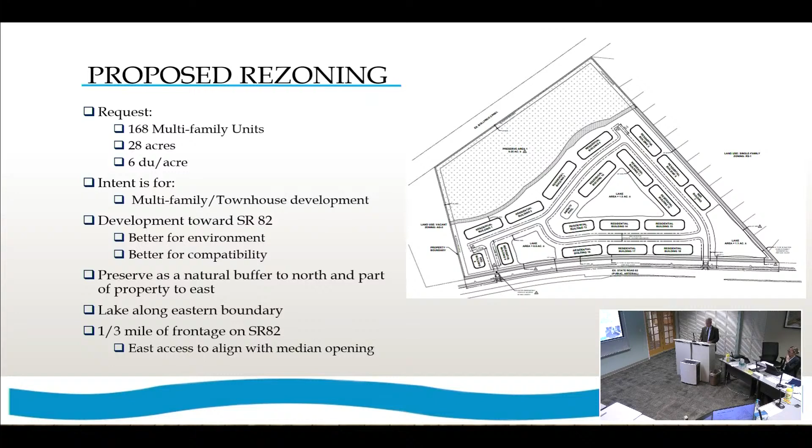Okay, so the criteria for approval is listed here in LDC section 34-145. I'll go through most of these, and others will go through pieces of it.

Compliance with or consistency with the comprehensive plan. As I said before, we're in the urban community future land use category, which is defined by policy 1.1.4. These are areas characterized by a mixture of relatively intense commercial and residential uses, language from 1.1.4. This is really the predominant land use category in Lehigh Acres. There's other central urban, which is a little more intense, but you see urban community throughout Lehigh Acres.

As I said before, there's a standard density range of 1 to 6 units an acre, but you could go up to 10 units an acre with bonus density, or 15 with the transfer of density units from Pine Island. In this case, we're proposing something right at 6 units an acre.

The wetlands on site are part of the wetland land use category in this northern area. We are preserving all of the wetlands on site, and so in accordance with the Lee Plan, we're able to transfer that density off of the wetlands at the rate of the adjacent land use category, which is urban community.

And what's the proposed building height? 45 feet, I need to look at the property development regulations. Sorry, let me just pull this up. I know you replaced the property development regulations from what was initially included in the staff report. I just want to confirm that the height limitation remains at 45 feet for the multifamily and 30 for the clubhouse. I believe that's the case, but I do not like misspeaking, which happens occasionally, so let me just try and check.

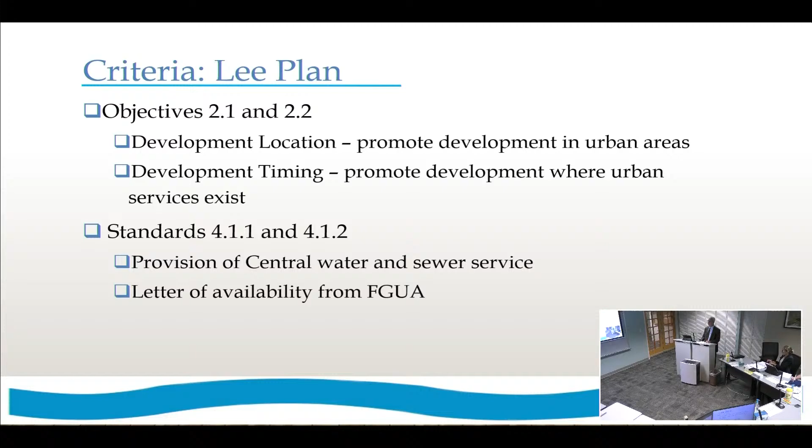Standards 4.1.1 and 4.1.2 require central water and sewer for this type of development. We do have a letter of service availability from FGUA.

Goal 5 talks about location for residential uses. Goal 5 itself encourages a variety of price ranges and housing types. Lehigh Acres, as you know, is the vast majority of which is platted single-family lots. This is a different type of housing unit in the community, so it's adding more of a variety of housing to the area, which we think is a benefit to the area.

Policy 5.1.2 directs residential development away from areas with hazards. This isn't an area where hazards exist, not the coastal high hazard area, not prone to flooding.

And then 5.1.3 is location criteria for higher density residential. Although I would not argue this is really higher density residential, I do want to note that Blackstone Corporate Park is right here. That was just entitled for, or re-entitled for, both industrial and commercial. So this is going to be a pretty large commercial center right here.

We do have several schools. There's a high school located right here, approximately 2 miles from the site, and an elementary school and a middle school. I will also note that right on this west side of Savannah Lakes, within a mile of the subject property, the school board owns property and is within active design on both an elementary and a middle school. So we do have quite a lot in very close proximity.

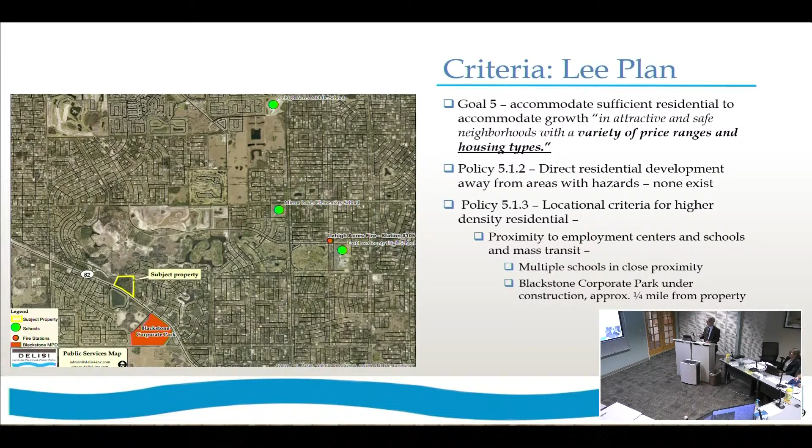Policy 25.10.1 deals with preservation of indigenous vegetation within the Lehigh Acres community. This is part of the Lehigh Acres community plan.

This policy encourages properties to preserve on their sites rather than mitigate off-site. We are doing that. We're not asking to preserve off-site, and we're not asking for any reduction in the amount of preservation.

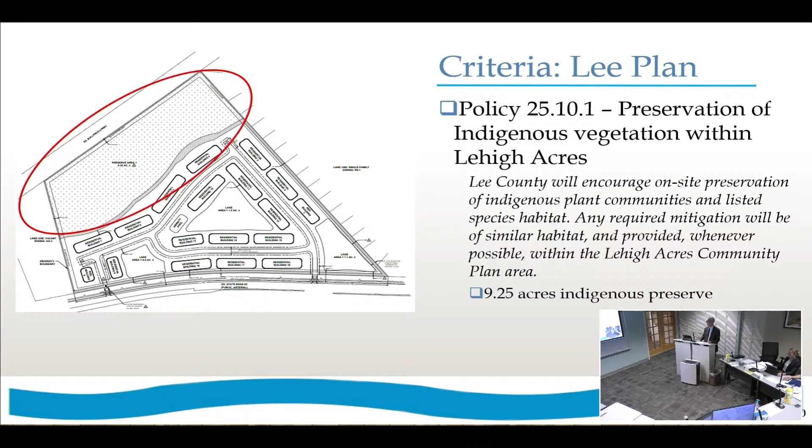The deviation on indigenous vegetation that Drew and Barrett will talk about is really to clean up the exotics in the wetlands so they classify as indigenous, allowing one larger contiguous preserve area. That's 9.25 acres of preserve.

The next criteria deals with compatibility of surrounding uses. As I said before, this is Savannah Lakes residential planned development, single family to the north. On our master concept plan, we have a nice buffer to them, which is a preserve. There's also a canal separating that MPD from the subject property.

That preserve area extends down south, probably about 3 lots, so it also includes a nice buffer for these northern 3 lots on the west side. The properties here are vacant, AG2.

We don't know what they would transition to over time, commercial, maybe residential, but right now they're vacant, AG2. To the south is State Road 82, a major intrastate arterial road through Lee County and elsewhere. And then to the south of that, we have an RV park.

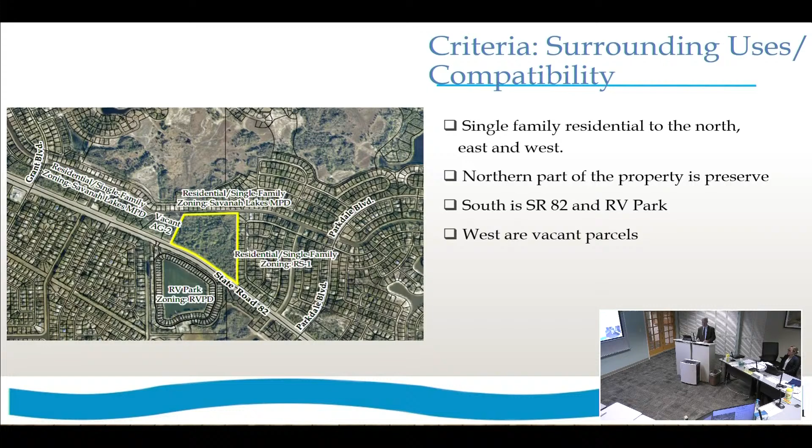As I said before, we're trying to orient the community to State Road 82, and to the extent possible, put things on our exterior to help with compatibility. So we have a lake here, which adds a nice setback of units and something nicer behind people's lots, and then a slightly increased setback along the western side as well. We also include code required buffers.

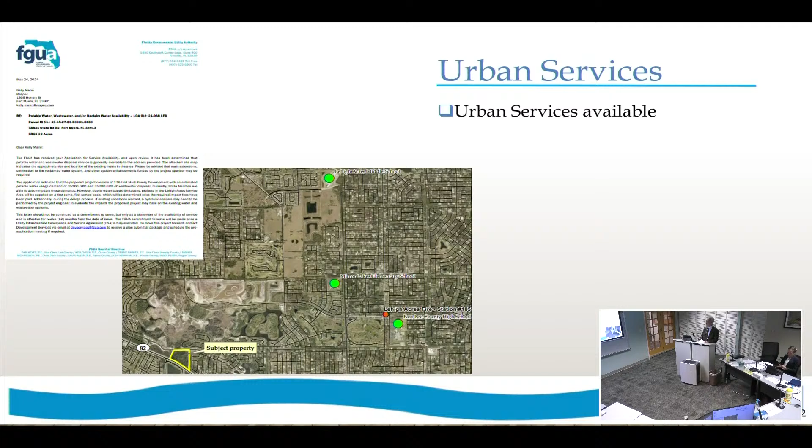The criteria with urban services, as I said before, we do have a letter of service availability from FGUA. Yuri will talk about transportation in a moment. And with that, I will hand things over to Barrett to talk about environment.

Thank you, Dan. Good morning, Barrett. Good morning, madam. How are you? Fine. Barrett Stayskill, Bear Paws Environmental. I've previously been tendered as an expert witness in wetland wildlife ecology. Please proceed. Thank you.

So the project is proposing to preserve all of the wetlands to the north. There will be no impacts to any of the wetlands. The preserve totals 9.25 acres and encompasses a majority of all of the wetland area. There were no listed species noted during the initial species survey.

An updated species survey will be conducted. Deviation 5 is necessary as it involves removing exotics and replanting of the wetlands due to the amount of exotics in there. The piece was very disturbed with high levels of exotics throughout, and that is the reason for deviation 5. It will allow us to have one whole large contiguous preserve area versus chopping something up around the property.

And that's all I've got for you. Do you have any questions? Are there heritage trees on the site?

There's potentially some, yes ma'am, I believe there are. Within that preserve? There are some within the preserve and some without. A survey will be done for those prior to development per conditions set forth in the Lee Plan. Any heritage trees identified on site will be replaced with a like tree of similar size and stature and be planted within the preserve or within the open spaces on site.

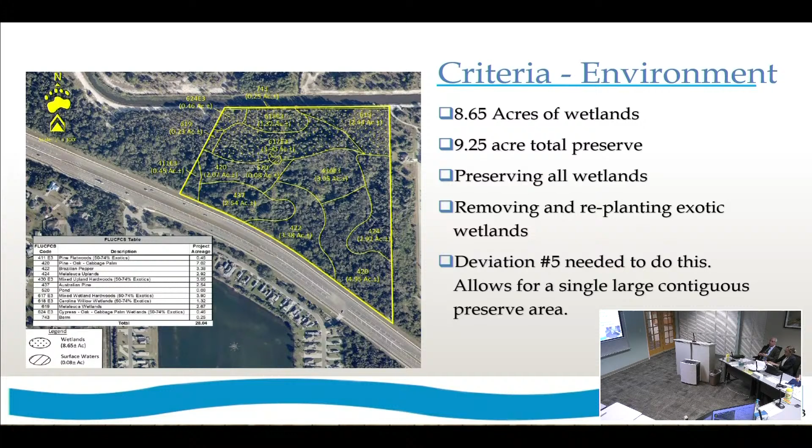Good morning. Good morning, Yuri. For the record, Yuri Baika with TR Transportation Consultants. I've been sworn in and previously accepted as an expert in transportation planning and would like to be accepted as one today as well. Please proceed.

Thank you. So we prepared a traffic study for this application. Our traffic study was completed consistent with the Lee County traffic guidelines for rezoning projects. As part of our traffic study, we first prepared a trip generation analysis, prepared consistent with the latest ITE trip generation manual to date.

So table two here shows you the trip generation potential of this project. One thing of note from this table is that the total AM peak hour and total PM peak hour doesn't exceed 100 trips.

As part of our traffic study, we weren't required to prepare a very extensive study at this time. So the only thing we prepared was basically our typical link level service analysis on the surrounding roadways, which included SR 82 west and east of our site. That roadway was shown to operate at acceptable level of service in the future build-out traffic conditions, both with and without the project traffic.

To answer your other question regarding SR 82, yes, it has a corridor access management plan. So that western access that we're showing as an emergency access is not on the corridor plan.

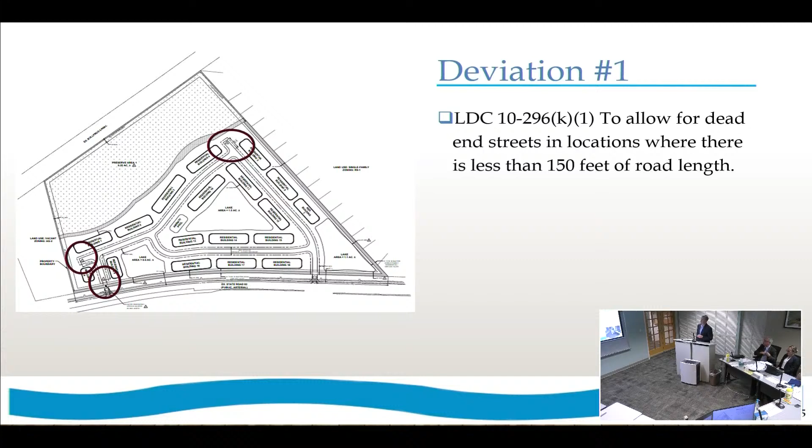Deviation 2 and 3 have to do with the setback of the lakes from the project boundary line. Deviation 2 has to do with the right-of-way line. There's a 50-foot right-of-way, or 50-foot separation, required from the property line. We've asked for 25 feet, and what's required along this property with the buffer is a continuous double hedgerow of shrubs all the way across the front of it. That, in addition to a raised berm, will provide protection for any wayward vehicles.

You're exceeding the type D buffer that would normally be required along the right-of-way because the excavation lakes are closer than what's permitted by code. We're required to provide that buffer, but it will provide protections against any kind of pedestrians or wayward vehicles getting into the lakes.

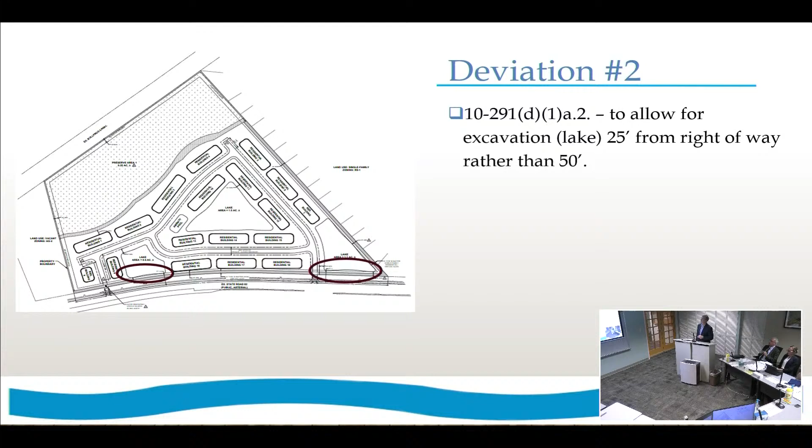Deviation 3 is in a different location, along the eastern boundary. Again, there's a 50-foot separation required at that location. We're proposing 25 feet, and we also have a type B buffer along that property line, which is essentially the same as a type D buffer in terms of the plantings. So it's a continuous double hedgerow.

Is there going to be trees and a berm? There will be a perimeter berm, since there could be homes there in the future. Yeah, we're aware of that. We're going to have a continuous hedgerow. The berm will be about 2 feet above natural ground, typical for a development. Is fencing proposed? No, we have not proposed any fencing.

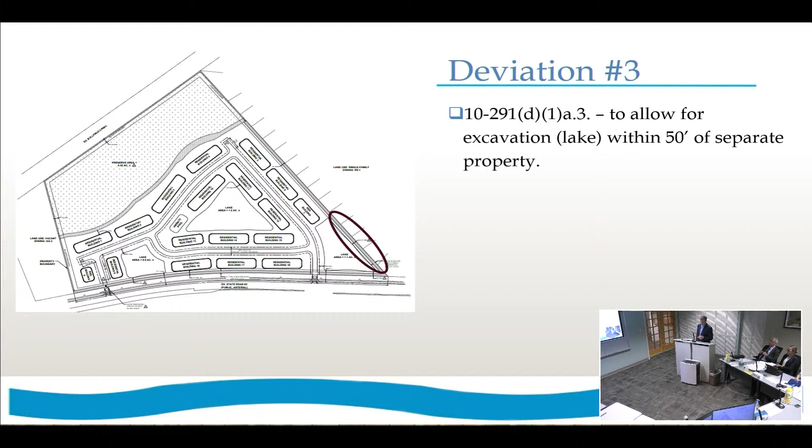Deviation 4 has to do with emergency access. Our experience with FDOT on this corridor is that we're only going to be allowed one full access, right in, right out, and that will be considered reasonable access. So we need 2 points of access for emergency vehicles, and that's why we're requesting a deviation for that emergency vehicle access. It will be gated, and there are 2 conditions for this deviation. We have no objection to those conditions.

No fence, no berm is going to be along that edge of the lake next to the residence? There will be a berm. How high will the berm be? It's typically about 2 feet.

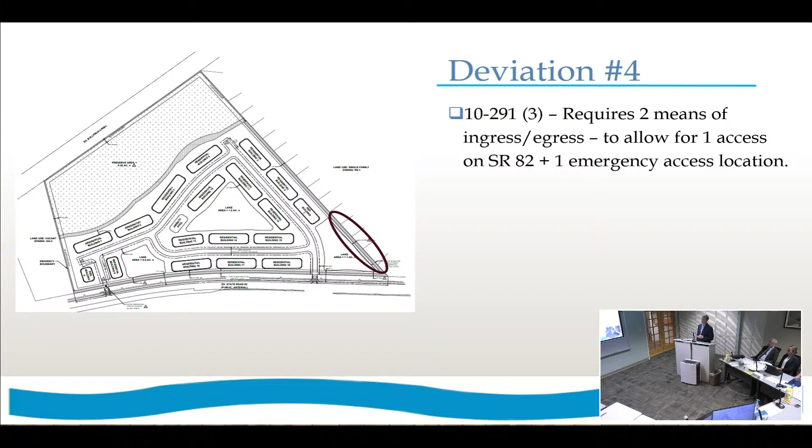Deviation 6 is just to allow for on-site or on-street parking. For townhomes, this development would park itself with each unit, but we've found there are needs for additional parking in these types of developments. So this deviation will allow parking spaces that come directly off the internal road network, instead of backing into a parking aisle, they're backing into the roadway.

So how is that going to work? You're going to have parking lots, right? Well, not in this case. This site plan is a townhome type of layout, so you're going to have garages with driveways. Those are 2 spaces per unit, so that meets the code. That would only apply in the townhouse scenario, not the multifamily scenario. In multifamily, there would have to be parking lots. And no off-street or on-street parking? No, it would be designed differently.

Now, this product has, instead of being platted, been done as multifamily developments. So you still have the garage, you still have the driveway. They're typically rental type developments. So you could develop this under the multifamily regulations, and as long as there are driveways and garages, you're still going to have parking.

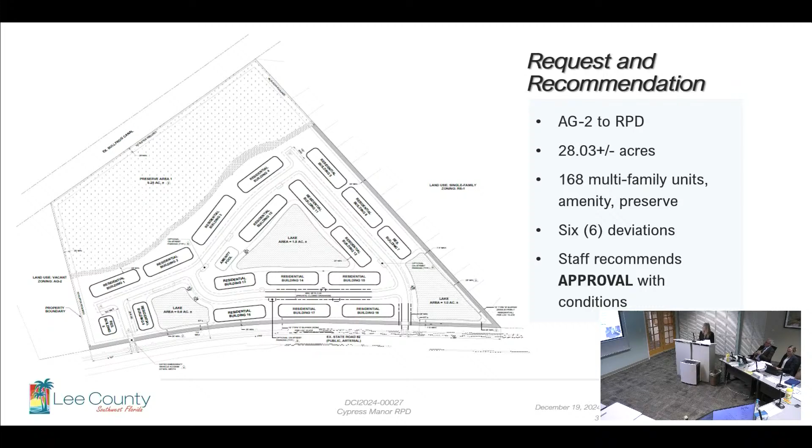We'll pull him up during the Lee Plan analysis portion. So the request and recommendation: DeLisi Inc. has filed an application to rezone approximately 28.03 acres from Ag 2 to RPD to allow a residential community with 168 multifamily units, an amenity area, and a community preserve. Six deviations were requested pertaining to circular turnarounds, excavation, ingress, egress, indigenous open space, and parking. Staff has recommended approval with conditions.

Some background on the property: it is located at 18831 State Road 82 between Grant Boulevard and Parkdale Boulevard in the Lehigh Acres Planning Community. The property consists of one strap and resides within the urban community and wetlands future land use categories as established by the Lee County Comprehensive Plan, and it is currently zoned Ag 2.

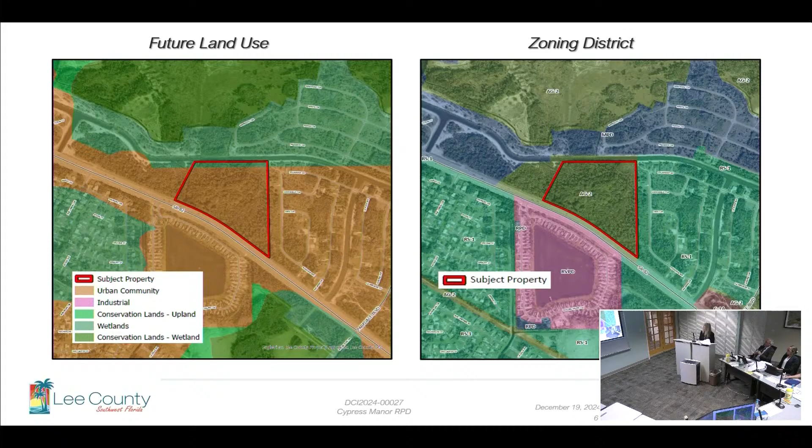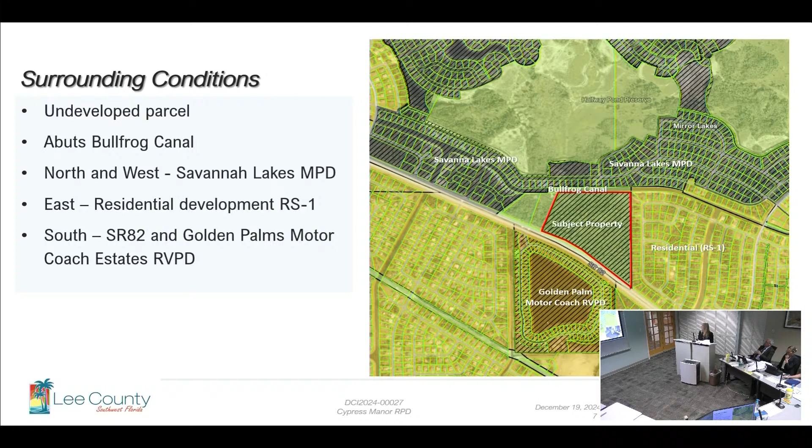Some surrounding conditions of the property: it's an undeveloped parcel abutting the Bullfrog Canal to the north and the Savannah Lakes MPD to the north and west of the subject property. East of the subject property is a residential development conventionally zoned RS1, and State Road 82 abuts the property to the south, with the Golden Palms Motor Coach recreational vehicle planned development further south.

Covering Lee Plan LDC Section 34-145, the following slides will demonstrate how staff has found the case sufficient and the applicant has met the listed criteria. As stated, the parcel is located in the urban community and wetlands future land use category. Urban community future land use is defined as areas characterized by a mixture of relatively intense commercial and residential uses. Pursuant to Policy 1.1.4, the proposed multifamily use is appropriate given its location, limited size, and proposed density. The applicant is requesting up to 168 dwelling units, just under 6 units per acre, consistent with the density range of the urban community future land use.

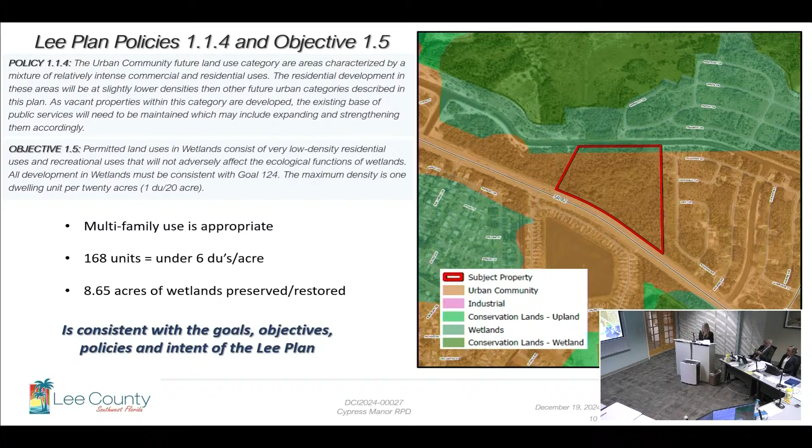The northern portion of the subject property abutting Bullfrog Canal, as you can see in the aerial, resides in that wetlands future land use. The applicant has stated that approximately 8.65 acres of wetland area will be preserved and restored, and the development will acquire the proper permits from South Florida Water Management District.

For objective 2.1, the Lee Plan promotes contiguous and compact growth to contain urban sprawl. The proposed rezone will allow infill development, with existing development and platted lots surrounding the subject property.

Objective 2.2 and policy 2.2.1 discuss new growth in future urban areas in proximity to available road networks and where adequate public facilities exist. The subject property is located in a future urban area, and the proposed rezone to allow a residential community is consistent with the density range in the urban community future land use category. Adequate public facilities and roadway networks are available.

The applicant has provided the required letter of availability from the FGUA, stating potable water and sanitary sewer lines are in operation adjacent to the property and have sufficient capacity to support the estimated flow demand provided by the applicant. The proposed development will connect to that central water and sanitary sewer service.

The applicant has also submitted a protected species survey and FLUCCS report for the property, and the MCP was designed to avoid impacts to the existing wetlands on the property.

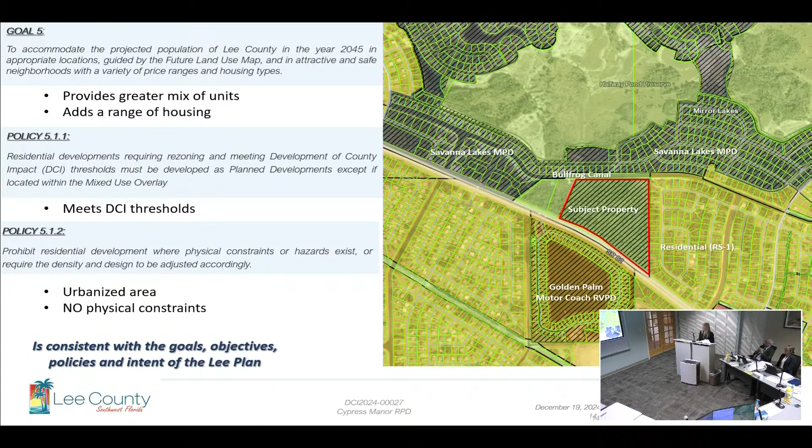Pursuant to 5.1.2, the subject property is located in an urbanized area with development on all sides and is not located in an area prone to flooding or storm surge or other hazards.

For policy 5.1.3, this directs high-density residential development to be located near employment, shopping, schools, and existing infrastructure. The proposed multifamily is within close proximity to all of those centers, and there are various retail uses along State Road 82 and Homestead Road, which is near the property. Fulfilling goals.

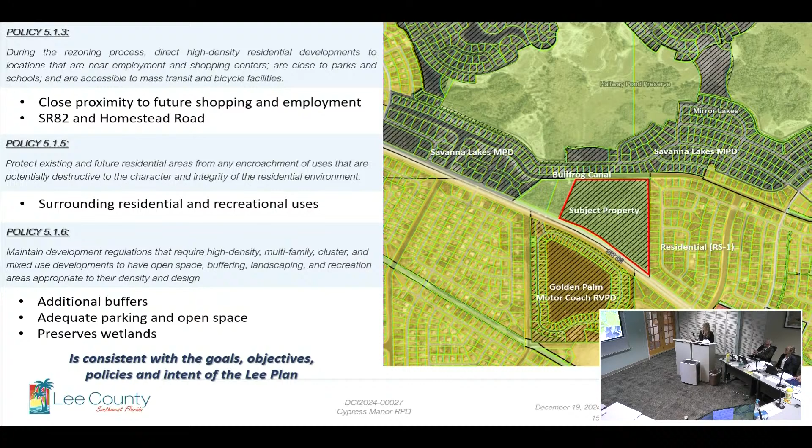For policy 5.1.5, the proposed multifamily units do abut those RS1 properties to the east and the Savanna Lakes MPD to the north and west, so they'll be protecting the existing area from encroachment of destructive uses. The applicant has proposed additional setbacks and required buffers, and the development provides adequate parking and open space features, including the amenity and water management lakes, while also preserving the wetlands that are on site, fulfilling policy 5.1.6.

Goal 25 for the Lehigh Acres planning community ensures that continued development and redevelopment converts the single-use antiquated pre-platted area into a vibrant residential and commercial community. As we previously discussed, this property resides in the urban community future land use category, which encourages that mixture of intense and commercial development, and the proposed RPD is compatible with that goal.

It also includes approximately 9.25 acres of preserve area, fulfilling objective 25.10 and policy 25.10.1. It protects and enhances the physical integrity and ecological values and natural beauty of the Lehigh Acres community.

The applicant stated that the water management will be designed with a control elevation consistent with the seasonal high water table for the existing wetland preserve, pursuant to policy 60.1.1 and 60.4.1, which encourages new development to design surface water management systems with those BMPs. Policy 60.4.2 encourages incorporating those existing wetland systems, which is what the applicant has done.

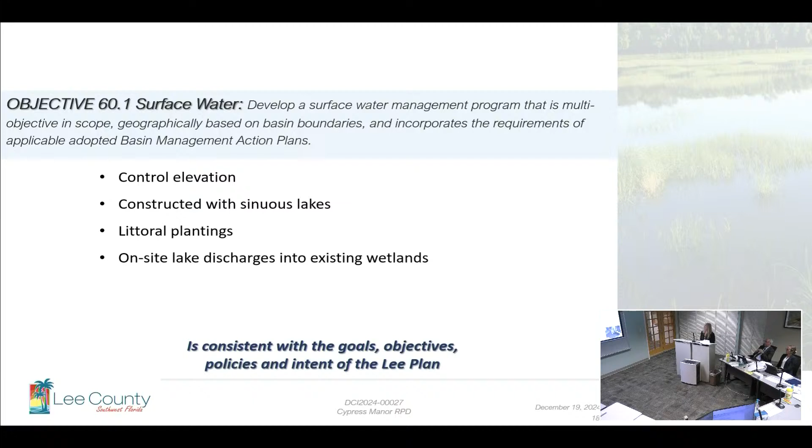Irrigation for the proposed development will be from the on-site lakes, and no potable water will be used, as no reuse water is available to the site.

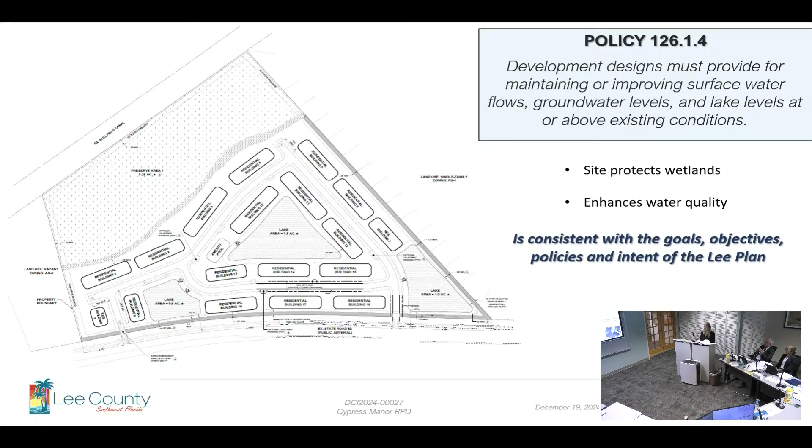Again, the subject property includes approximately 8.65 acres of wetland area, all of which will be preserved and restored consistent with Goal 124. Policy 126.1.4 states that development must provide for maintaining or improving surface water flows, groundwater levels, and lake levels. Again, this site is designed to protect and preserve the existing wetland and incorporate these areas into the surface water management plan.

For meeting code and other applicable county regulations, the applicant has acknowledged that at time of development the LDC and other applicable county regulations will be required. They have requested the following 6 deviations. I'll try not to belabor them too much. The applicant did a good job with those.

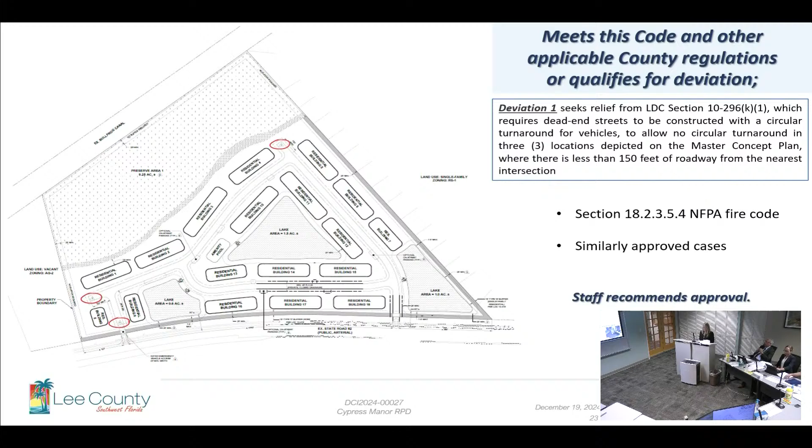Yeah, if you could just focus on the one requesting a 25-foot setback from the adjacent residential platted lots and the on-street parking. Sure, I think your time would be best spent on that.

All right, so deviation 2. Deviation 2 seeks relief from LDC section 10-329D1A2, which requires that no excavation be allowed within 50 feet of any existing or proposed right-of-way line or easement for a collector or arterial street. They'd like it to allow a minimum setback of 25 feet from State Road 82.

The request is to allow for 2 proposed water management lakes to be excavated within 25 feet of the State Road 82 right-of-way, constructed with raised curbs to prevent vehicles from leaving the roadway. The edge of the roadway is located approximately 42 feet from the subject property line. The applicant proposes a type D buffer and raised perimeter berm along the right-of-way line to provide additional barriers, and staff has recommended approval of that.

Okay, I'm sorry for not clarifying. I'm concerned about the lake that's adjacent to the residential development, this right here. So I think that's the following deviation 3. Okay.

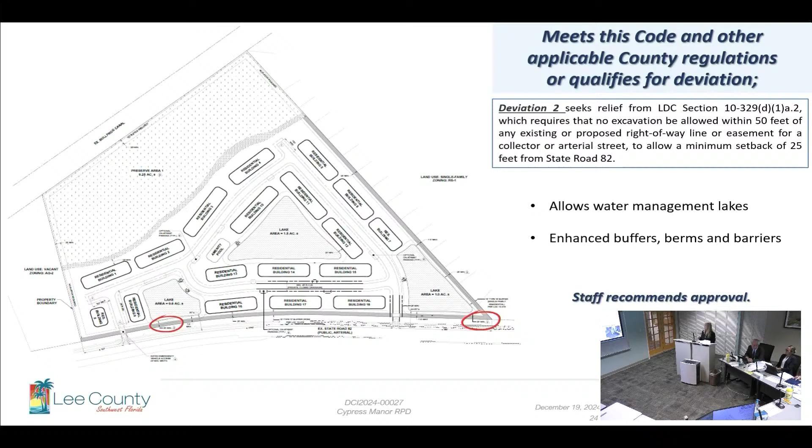So deviation 3 seeks relief from LDC Section 10-329D1A3, which requires that no excavation be allowed within 50 feet of any private property line under separate ownership, to allow a minimum setback of 25 feet along the eastern property line.

A proposed raised perimeter berm and type B landscape buffer will be provided where the lake abuts the property line, adjacent to a vacant single-family lot along the eastern property line, providing adequate physical barriers between the lake and the future residential uses.

I'm having difficulty placing a case where we permitted a setback like that without a wall or a fence. Maybe you can help me point me to a case I can review that would give me the comfort in considering this as an approved request. Okay, I'll have to reconvene with you. That's fine? Yep, that's fine.

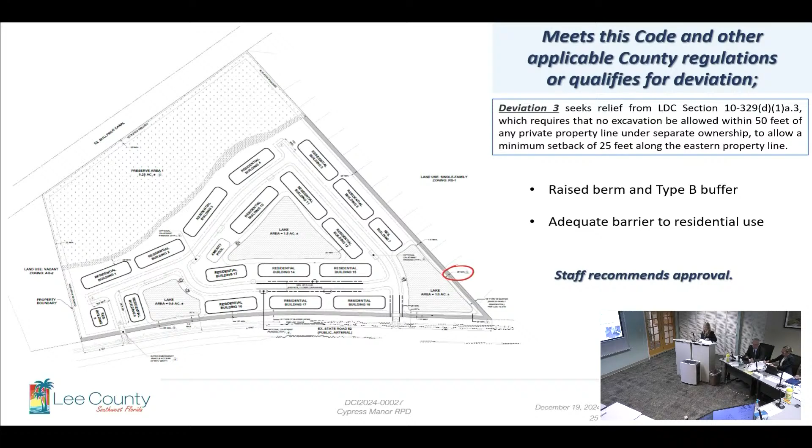Okay, and what was the second one for the on-street parking, which I believe is... that might be the last one. Five. Six.

The proposed multifamily RPD would include individual garages and driveways, and the use requires additional guest parking in these types of developments. On-street parking has been used on similar projects to provide additional required parking spaces for the residents and amenities.

So this is not for the stacking, though. This is to allow the parking on the street. Yeah, the first part of it was to allow parking on the street, and staff recognized that the multifamily part of that did not allow for the stacking within the driveway, so we gave them relief on that as well.

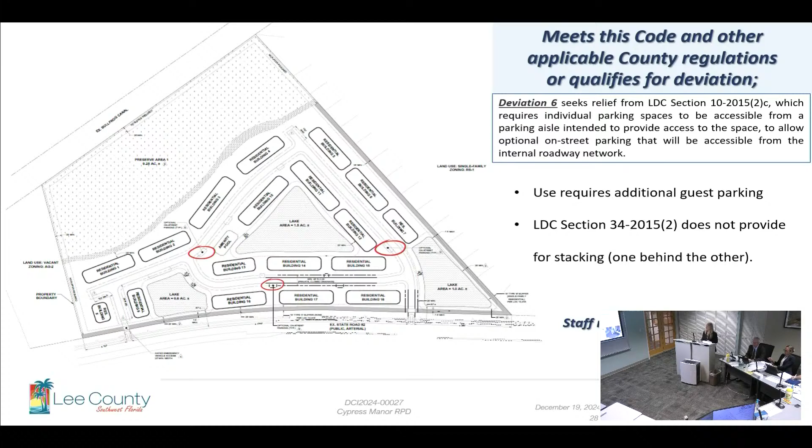For providing sufficient access, the property is located along State Road 82, an arterial roadway in Lehigh Acres with approximately 1/3 mile of frontage. They have proposed 2 access points, with the eastern access located to align with the median opening on State Road 82, and a second western access for emergency vehicle access, which sufficiently accommodates the proposed development.

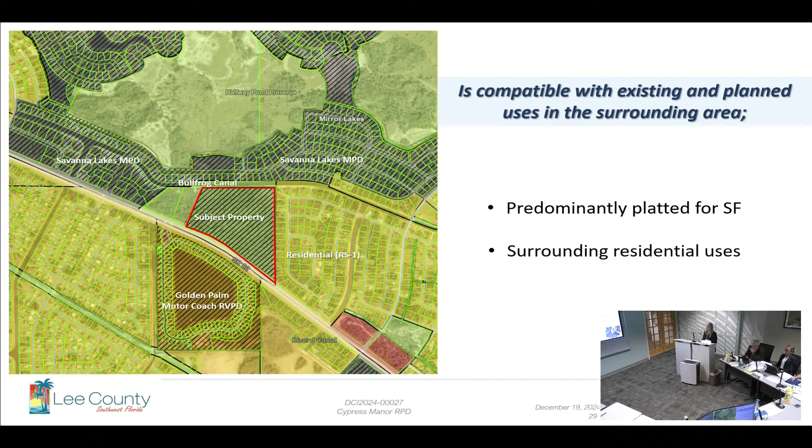The applicant's traffic impact statement indicates no roadway segments will be significantly impacted as a result of the proposed development, comparing the functional classification of the 168-unit proposed multifamily to the calculated 2029 traffic volumes. It was determined that all analyzed roadways are projected to operate at or above the minimum adopted level of service in 2029, both with and without the proposed development.

As a result, roadway capacity improvements are not anticipated to be required as a result of this request. The applicant indicated turn lanes and other site-related improvements will be further analyzed at the time of DO. Additionally, Lee County DOT did provide transportation-related impact analysis stating that the development would also create no additional impacts.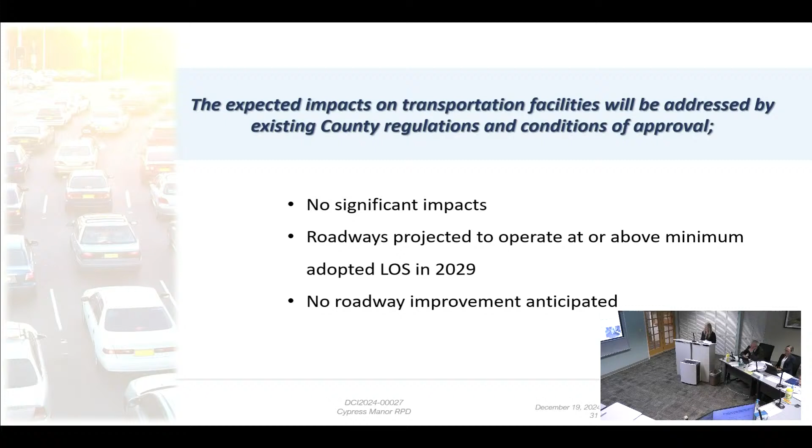The applicant also provided the required protected species, FLUCCS maps, soil maps, rare and unique habitat, and topographic maps, and existing flowways. The request will not adversely affect any environmentally critical or sensitive areas. County environmental staff also provided a report analyzing the request. They made the following suggestions and findings.

The project does meet the large development definition from LDC Section 10-415 and requires the applicant to provide 40% open space. The total open space required would be 11.21 acres, and the applicant is providing 12.05 acres of open space, and an open space summary is reflected on their master concept plan.

Indigenous open space: LDC requires for large developments with existing native vegetation that they provide 50% of their required open space through on-site preservation of existing native vegetation communities, again pursuant to LDC Section 10-415B. This property is greater than 10 acres and is considered a large development.

An indigenous preserve management plan was provided by the applicant, and the goal of the plan is to ensure that the preserve is maintained exotic-free through a scheduled maintenance program. The management plan will be done in a two-phase process: the initial mechanical removal and then the sustained maintenance, in perpetuity with annual inspections. They will occur even after the success criteria has been reached.

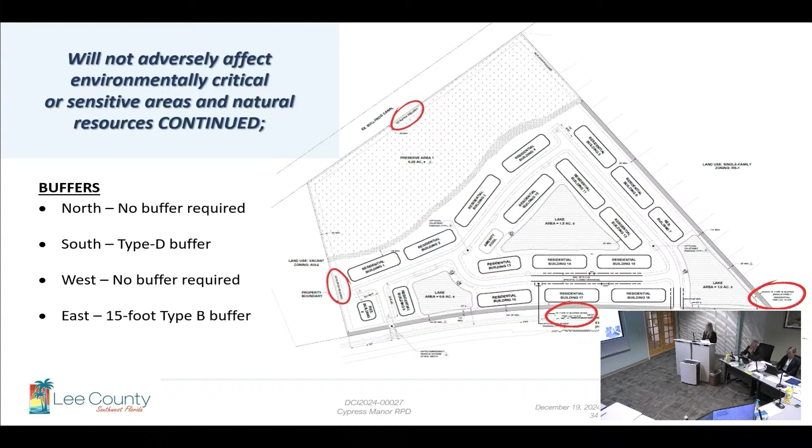Property is serviced by FGUA, the Lehigh Acres Fire and EMS districts, the Lee County Sheriff's Office, solid waste, public transit, in addition to public schools and parks.

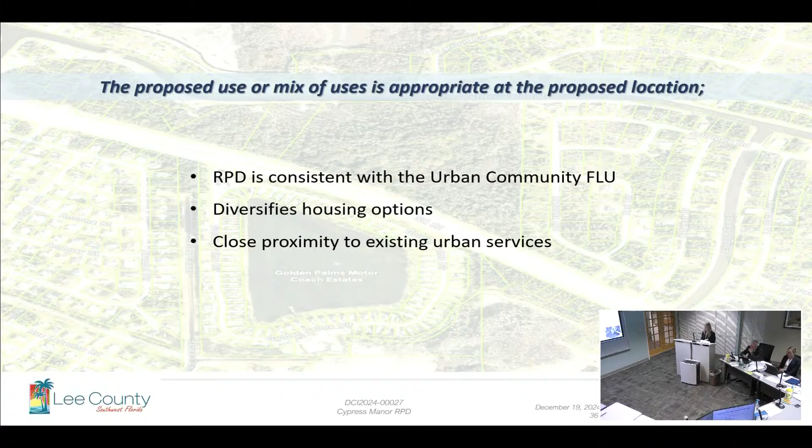The proposed RPD is consistent with the urban community future land use category and is located along a major roadway corridor among other residential uses. The proposed use represents an opportunity to diversify housing options in the Lehigh Acres planning community, and it's also in close proximity to existing urban services.

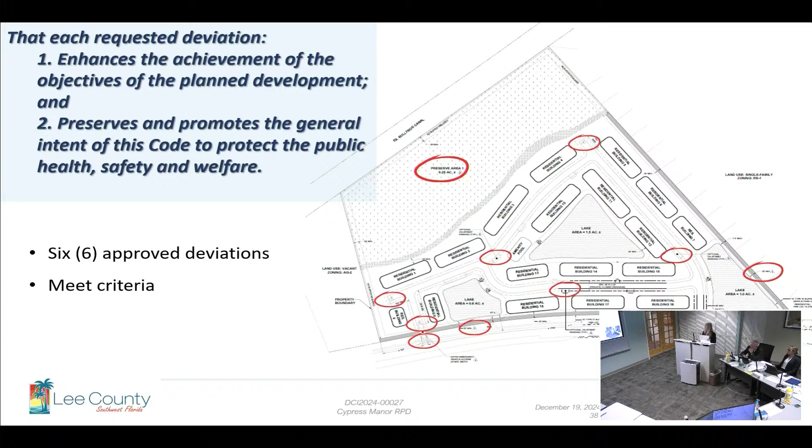The recommended conditions provide sufficient safeguards to the public and relate to the impact the request will have on the surrounding land use. The 6 requested deviations from LDC requirements, staff has recommended approval, some with conditions, but we found that they do meet the deviation criteria. In conclusion, the requested amendment meets the review criteria established in LDC section 34-145. Therefore, staff does recommend approval of the applicant's request and conditions.

Thank you. I don't have any questions. I'm ready for any member of the public that wishes to speak. I have one sheet. Derek Felder, do you wish to speak, sir?

I stole the pointer if you need it. I don't think I need the pointer. I'll pull that. Derek Felder, for the record.

Schools were mentioned, I'm glad you brought that up. I think you argued the fact that their analysis says there's going to be 68 students. I forget the exact numbers, but I think Lehigh is 3 times more likely, I'm not sure what the word is, but more likely to have children in homes than anywhere else in Lee County. I forget the exact numbers, but Lehigh has substantially more children per capita compared to everywhere else.

This project to me is very similar to the one done by Harns Marsh, the Eunice townhomes, but I believe that's all platted. And I don't see a scenario where this should be allowed at all without at least sidewalks on one side of the street, whether there's on-street parking or not, sidewalks on one side of the road need to happen regardless.